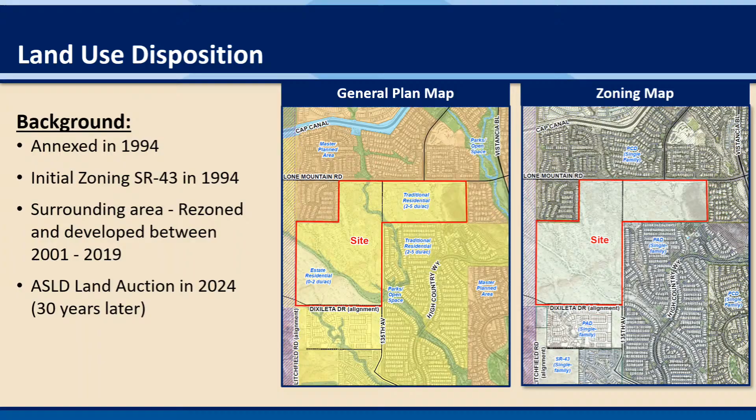As far as zoning goes, zoning is the actual development standards that would apply to the property. The site is zoned SR 43, and the surrounding areas, as mentioned, are primarily master planned areas, whether it be a planned area development or a planned community development.

Before we get into staff's analysis, I first want to orient you and give you a little bit of background on what the applicant's proposing to do should the zoning case go through, and give you an idea of what they're looking at proposing. This is a conceptual drawing of what the applicant is seeking to do.

The development, as proposed, would be an ungated 655-lot single-family residential community. The proposed planned area development standards would require 90 acres of open space.

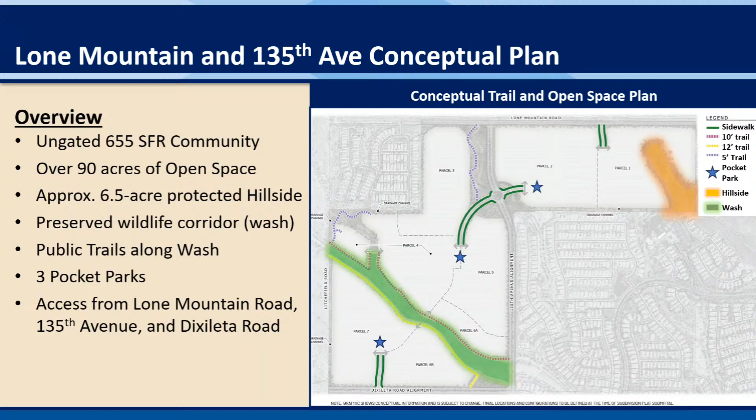That thumb I had mentioned earlier is a little easier to see here. The hillside area is about 6.5 acres and is expected to be protected on the property. There are two washes, as mentioned earlier. One of them is significant, has a larger flow, and would require a wildlife corridor.

As you can see in that green shaded area, there's a wildlife corridor proposed with trails on both sides of the wash. There's a less significant wash area with less flow along the 135th Avenue alignment, which is proposed to be preserved as an open space area with a trail along it as well.

Within the development, there is a proposal for 3 pocket parks strategically placed throughout the development to provide open space for residents. Since it's ungated, any neighboring property would have access to use those trails or access the wash corridors should they wish.

In addition, there is a proposal for access points along Lone Mountain and Dixileta Drive. Specifically, 2 points would be proposed along Lone Mountain to the north along the 135th alignment and the Westland alignment, and a third one along the Dixileta alignment to the south.

Through various conversations, the applicant group has coordinated with residents through public engagement and worked on creating design mitigation to try to come up with a solution that would be appealing to residents and make sure that it was context sensitive. Part of their discussion had led them to create additional standards for land use buffers.

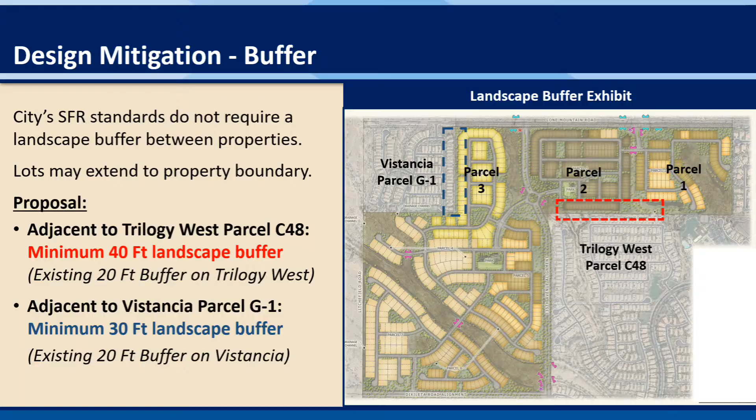Within this particular development, as part of the zoning stipulations, the applicant is proposing to impose their own land use buffer to parcels 3 and 2, as seen on the screen. This land use buffer would apply to lots located on the border of Vistancia parcel G1 and Trilogy West parcel C48.

Specifically, the applicant would be required to have a 40-foot wide landscape buffer added to the southern property line, shown in the red dashed line. In addition to the 20 feet already provided with Trilogy West, it would result in about 60 feet of landscape buffer between the two residential lots.

On the west side, looking at parcel 3, there would be a 30-foot buffer in addition to a 20-foot buffer, resulting in a total of about 50 feet of landscape buffer. This is a pretty generous buffer considering that single-family residential doesn't need a buffer, but they've worked it out in those specific areas and will be integrating it into their development standards should this be approved.

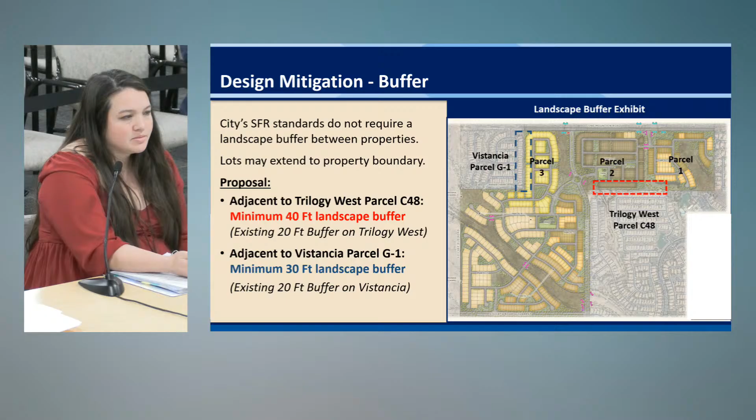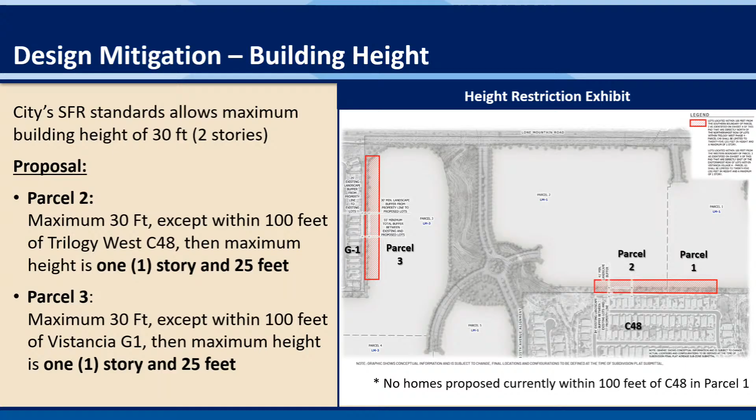The second consideration the applicant worked with neighbors on was maximum building heights. In single-family residential, the majority of developments are permitted a 30-foot building height, equating to about a 2-story house. Within this development, the applicant proposes restrictions within parcel 3 and parcel 2, requiring that all homes within 100 feet of the southern and northwestern property lines, shaded in red, have a maximum height of 1 story and 25 feet. For context, recent design review applications have had elevations up to about 23 feet, comparable to a 1-story house, so it's specific to identify 1 story and 25 feet.

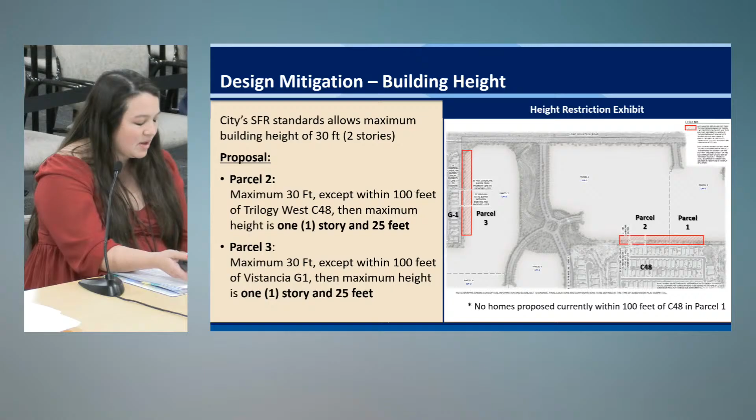Now looking at staff's analysis on the actual property. Our main role is to evaluate the land use types being proposed, the limitations identified as part of the development standards for a planned area development, and then make an evaluation on what those standards are. When we evaluate projects, we can't evaluate whether a product is for sale or for lease, and we can't base our opinions on perception or what could happen based on the type of people that might move in. We have to make sure decisions are based on code requirements rather than being arbitrary. So we're proposing what is existing on the site, what can happen on the site, and how this proposal compares to what's already allowed in that area.

Another thing to note is the authority of the case: it's not a staff decision, and it's also not a Planning and Zoning Commission decision. Ultimately, as a result of this meeting, it's going to go to City Council, and City Council will be the ones to decide whether the zoning case is approved. Today we're really just talking about the use and whether or not it's appropriate, and making recommendations.

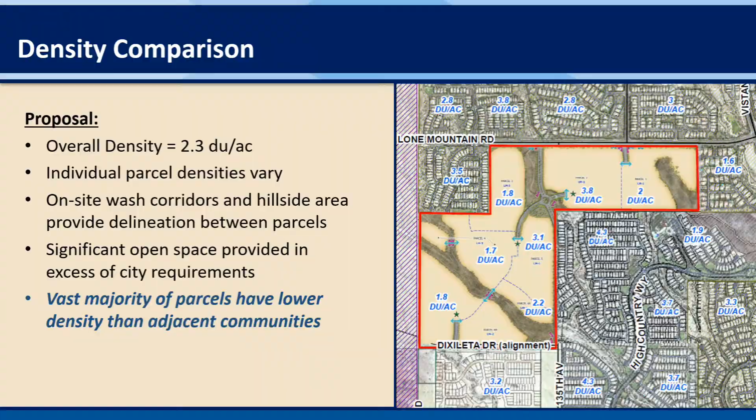For context, the estate residential portion is at 1.8 dwelling units per acre for that one parcel. Looking through the development, parcel 2 is labeled as 3.8 dwelling units per acre in the center of the site, just east of 135th Avenue. Whereas if you look south in the Trilogy West area, there's a 4.3 dwelling units per acre density in that same traditional land use classification. So even though parcel 2 is the most dense area within the proposed planned area development, it's actually less dense than what exists just to the south of it.

Similarly, when you look at the G1 parcel, which is 3.5 dwelling units per acre on the Vistancia side, it neighbors two parcels, 3 and 4, that have 1.8 and 1.7 dwelling units per acre, which is much lower than the surrounding area. As a result, looking at the individual parcels and the development as a whole, the site is in conformance with the general plan land use classifications, and it's comparable with, if not less than, the surrounding area.

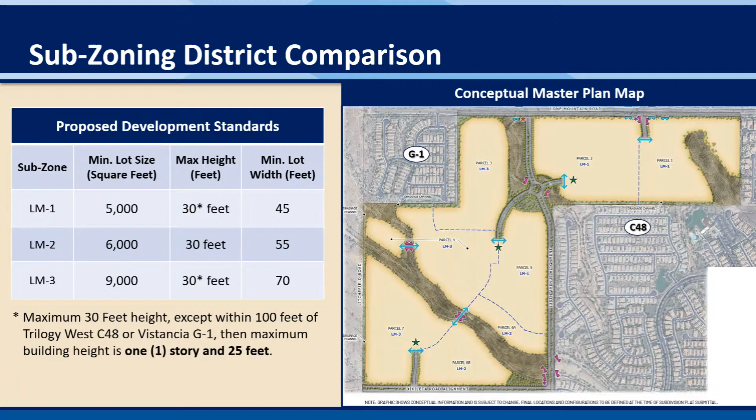As previously noted in the development summary, the applicant is proposing an added restriction on their development, which would restrict the building height on a couple of lots within parcels 2 and 3, limiting the height to 1 story when on the border of the existing residential developments in Trilogy West and Vistancia.

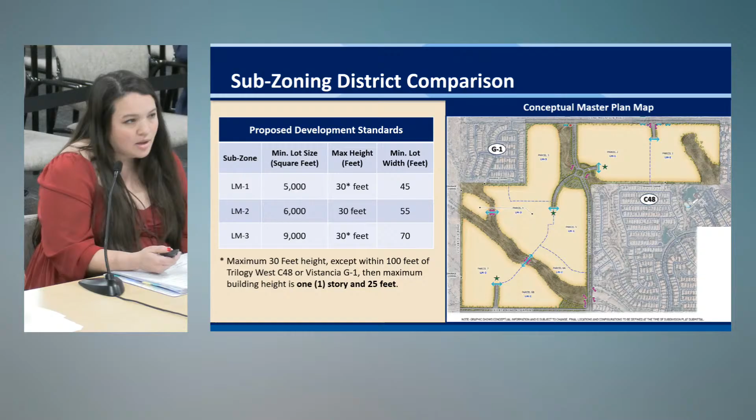Zooming out a little bit—I know this is harder to read, but I wanted to share a comparison of the development standards. The next step is evaluating how those proposed development standards align with adjacent development. Within the adjacent area, the smallest minimum lot size is directly across the street from parcel 3, located in Vistancia Parcel 3, which has a minimum lot size of 3,400 square feet and a minimum lot width of 40.

The largest development standard requirement is located in Parcel A1, just to the east of the site, which has a minimum lot width of 60 feet and lot area of 10,000 square feet. All other development standards have a largest lot width of 65 feet as a minimum requirement, but most fall within that range between 3,000 and 10,000, with the majority falling around 6,000.

So when you look at the comparison of the development standards, the proposed lot width minimum of 45 feet is actually wider than the minimum lot requirement of the developments in both Vistancia and Trilogy West. And the minimum lot area is also very comparable with the existing development.

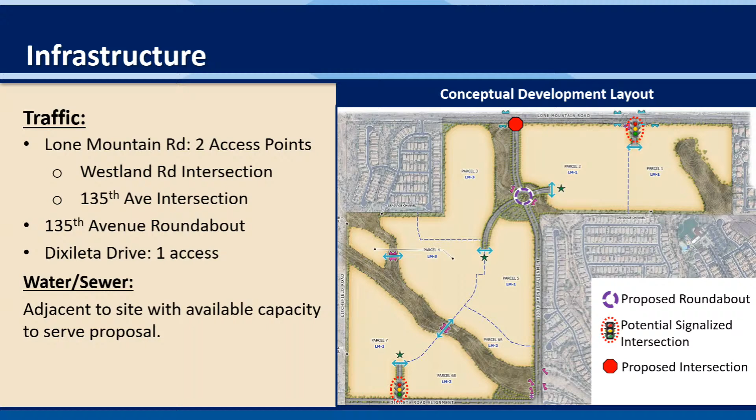However, as part of the conceptual plan that the applicant has drawn out, they are seeking to maintain that area as open space. They're proposing to put a trail in and have that water still convey through the site. That is part of the reason why the 135th Avenue is changing the alignment to allow the water to flow through the site. So that is an added change that the applicant has proposed, which adds more open space than what would typically be required.

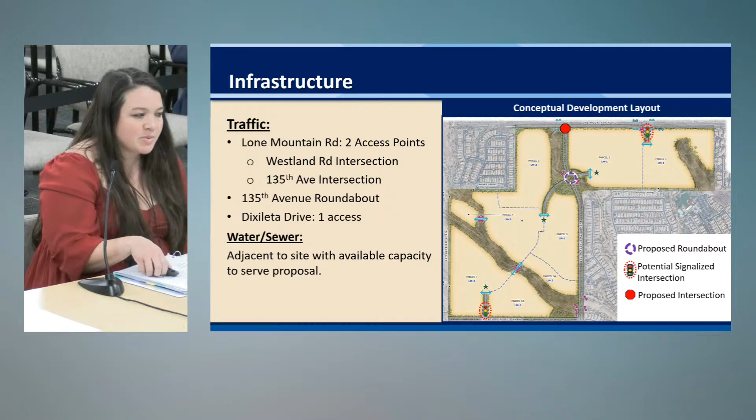So next, onto the community outreach portion. I think this is the last title for you guys to go through with me. But with any outreach or with any planned area development or rezoning process that is being created, the applicant is required to go through an outreach process.

Whenever we receive entitlement cases, we send notices to surrounding community partners such as the school district. This specific property is located in the PUSD boundary. Specifically, students would attend the Lake Pleasant Elementary School or Liberty High School. The city has not received any specific comments related to this project from the school district at this time.

The applicant is also required to hold at least one neighborhood meeting. They held that meeting in June at the Vistancia Elementary School. There was a pretty large attendance at that meeting. It was an open house format, and there was approximately 93 people that went in and out during that hour and a half span.

There was 37 comment cards that were provided to the applicant in response to that meeting, in addition to 5 emails that were sent after the meeting. Also note that the applicant hired an outreach team, so as a result, a lot of the correspondence related to the case was directly received by the applicant's outreach team and captured within their citizen participation plan, which a lot of times we receive directly, but in this case, there was a lot that went through them as well that we did not receive specifically.

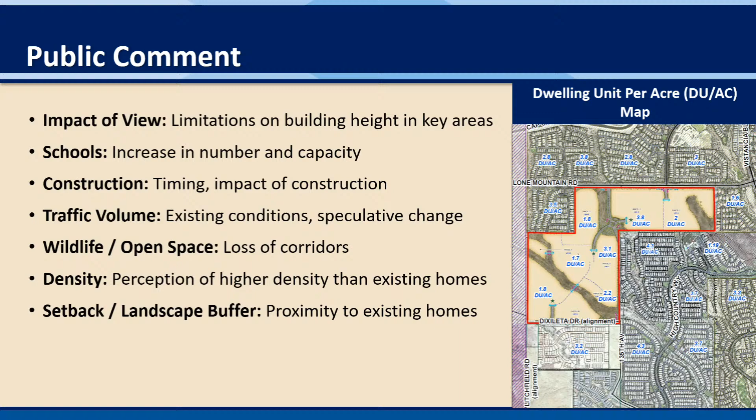Looking at the specific comments that were received, here's a summary: there were comments related to impact of views, school, construction, traffic volume, wildlife, open space, density, and setback. I'll break down each of those comments more specifically on this slide.

The first item, which was a recurring theme, was related to impact of views. This comment was twofold. Some individuals were commenting on the fact that the state land was sold and the property was getting developed. As noted before, it's state land's mission to sell land for development when it reaches its economic value for the benefit of state beneficiaries. So the land was never entitled for open space. The reason that property is getting developed is because it came to market for the first time in 30 years, and now has ownership seeking to develop it.

The other part related to impact of views was more specifically about the visual impact of buildings and how those buildings would look from residential lots. As we discussed when looking at development standards, 30 feet or 2 stories is typical across all single-family residential. Current standards for what SR 43 allows would permit 30 feet or 2 stories. So the applicant's proposal to add a restriction of 1 story mitigates some concerns, going beyond what would typically be required if they developed as currently entitled, and is also generous compared to what exists in the existing planned area development requirements.

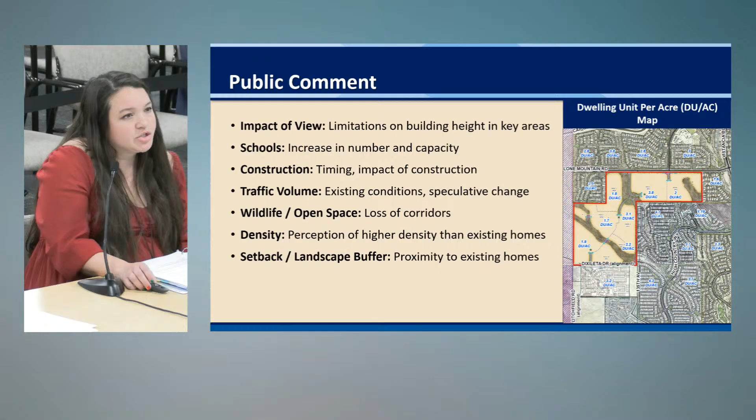So that was a lot, but in summary, staff finds that the density of the proposed development aligns with the general plan and is consistent with what is in the surrounding area. The development standards proposed are sensitive to comments and other design solutions.

That are not currently offered in the existing zoning designation or what could be developed on the site. The site integrates open space areas along the Wash and Hillside area, which aligns with the general plan policy and goals. And if the rezoning were to be approved, it is not anticipated to have an inordinate impact on the adjacent properties.

So with that, there are a couple actions that Planning and Zoning Commission is able to do in response to this presentation. They can recommend with modifications, recommend to deny, or recommend to continue this case. With that, staff recommends approval of item 3R to go to City Council subject to conditions of approval in Exhibit 1.

So two things: the applicant is available, they have a presentation that they were hoping to give. Staff is available for questions, and I know there are a number of members in the audience who wish to speak as well after the applicant's presentation.

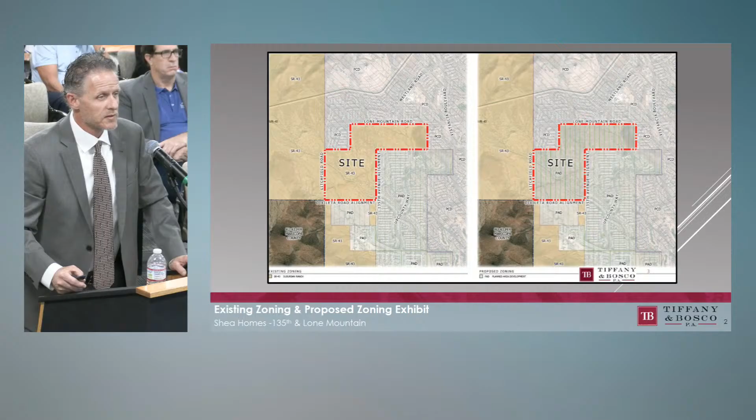I'm going to sort of repeat some of that, but I'm going to stick to basically the general plan and our neighborhood outreach and not be as repetitive to what was already stated. Again, our rezoning is to a PAD. It is similar to the surrounding zonings that we're surrounded by with regards to the PCD, a similar zoning district, as well as the Trilogy PAD and the PAD that's directly south of us.

With regards to the general plan, Sarah did mention that we have two different residential districts, an estate residential and a traditional. We are well below the densities allowed in those districts. And from the beginning, and I'll go to this next slide which sort of zooms into the two residential categories, the light yellow and the darker yellow, we have been from pre-app all the way to today basically showing a lotting plan, even though the lotting plan isn't a part of your zoning case.

We wanted to be specifically transparent with what the goal was, which is to develop a single-family neighborhood that is compatible and consistent with our surrounding properties.

In our pre-app, we actually included a lotting plan. This plan has changed several times, but this one was done for the GP analysis, demonstrating that the GP allows for 1,180 units if someone could fit that on this site. We're proposing approximately 655 as part of our PAD ask. The plat we've submitted to the city is at 641 lots, based on all the open space requirements and design changes we've made.

There's just a couple of the goals from the general plan. There's a lot more in the staff report and in our narrative, but basically the outline I've highlighted in green demonstrates that we've met the open space requirements and the goals and policies of your general plan with regard to the design of this plat.

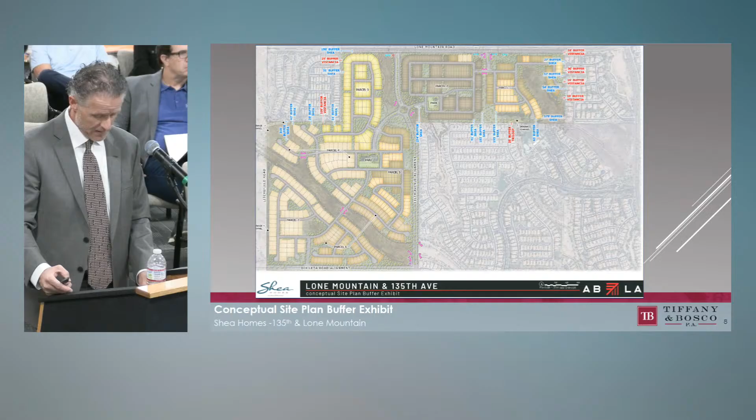From June until now, we've been working with staff and the neighborhoods, responding to issues and coming up with solutions on the buffers, where we can do the single-story option, and what the makeup of 135th Avenue could develop out as. For the past 5 or 6 months, we've been working on those consistently. In that time, the most we heard from were Trilogy residents, so we decided to do another open house at their clubhouse on November 24th, where we had about 65 attendees, and we walked through the changes we made, which mostly dealt with buffers.

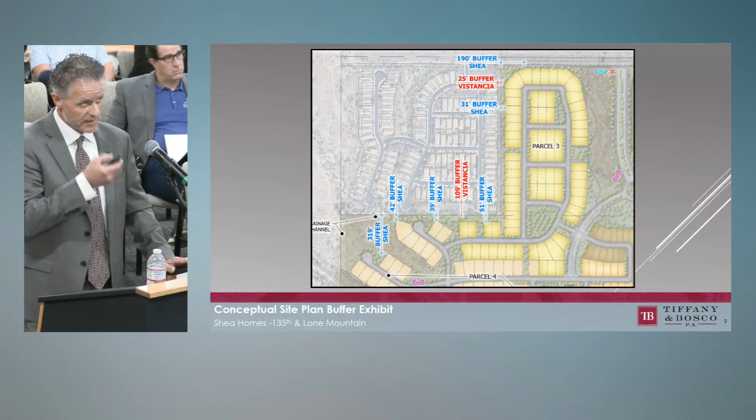Let me get to the Vistancia area—that's this graphic here, a close-up of our northwest side. We wanted to make sure our buffers were bigger than the buffers adjacent to us. That was one goal of ours.

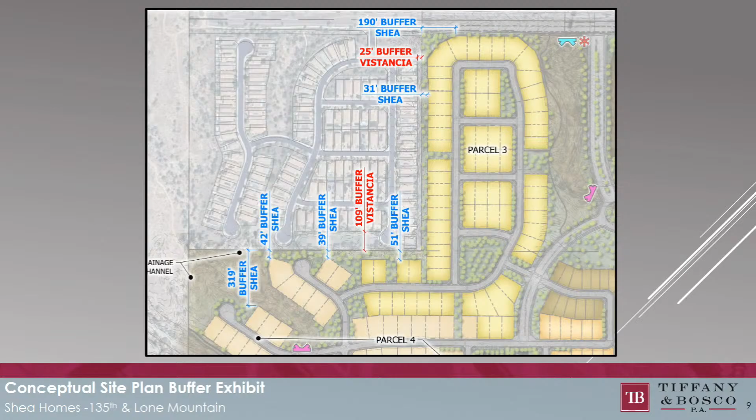Their buffer is at about 25 feet, in red there on the east side of their subdivision. Ours is at 31 feet. Also, in those rows of homes in yellow along our west property line where it says 31-foot buffer, we're going to stipulate those homes to be single-story. Those are for the Vistancia residents. They showed up at the June 4th open house, and that was their main concern. We have larger buffers along the south, but I think those were the less concern with regards to buffers and single-story.

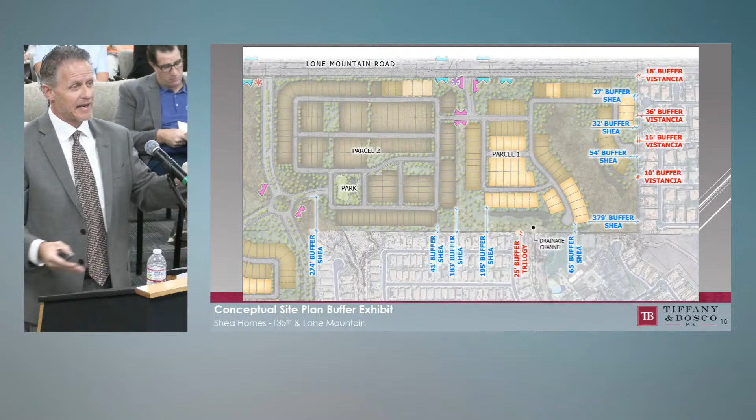So that gives you a 65-foot plus buffer between the backs of walls to the Trilogy lots and our walls. We have some greater buffers. I think the key is if you look at the land plan, Trilogy from the east over to the west has a cul-de-sac coming up on the east end with lots on it. Well, we have a cul-de-sac coming down with our side lots showing up on it. So we didn't really stack our lots along the south boundary. We utilized open spaces similar to the way they designed their site.

They have a large amenity center there where it says a 65-foot buffer, Shea. That's a large amenity center that they have. So we basically have an open space and a cul-de-sac adjacent to that. As you keep going west, we have a very large open space that handles drainage and open space. We have a 35% requirement for passive, active, and natural open space. So we put it in spots that were beneficial to our adjacent neighbors.

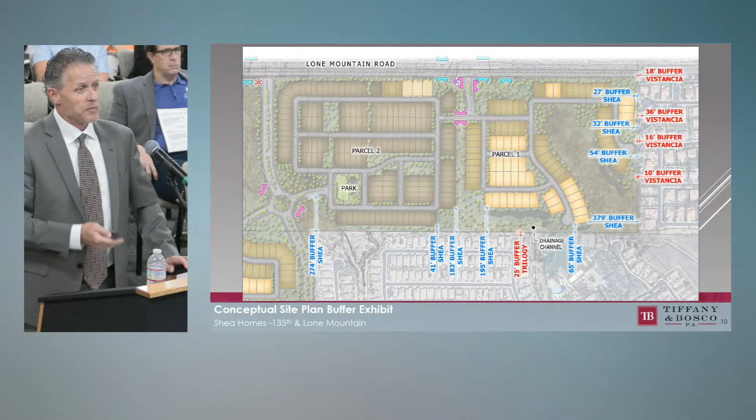Then you have the row of lots on the Trilogy side along the entire north side of Montesoro. I'm not sure the number of lots, let's just say approximately 20 lots. We did not align our lots along our south property line with theirs; we offset it further to the west. We're committing that every lot that backs to a lot - approximately 7 lots there on the Trilogy West side - will be single story on those lots that directly back to it. That equates to about 7 or 8 lots on our property. We want to commit to those and we put those in our PAD standard booklets.

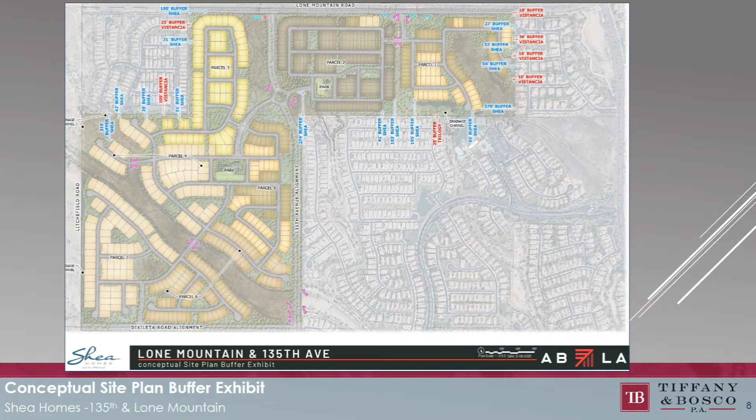You may hear tonight, and we've gotten some emails post the November 24th meeting, a request along - let me go back to the big graphic here - along the entire west side of the 135th Street, 35th Avenue alignment. We received some more requests for single story along our eastern side of our development, basically directly west of the 135th Ave alignment. We haven't made those changes.

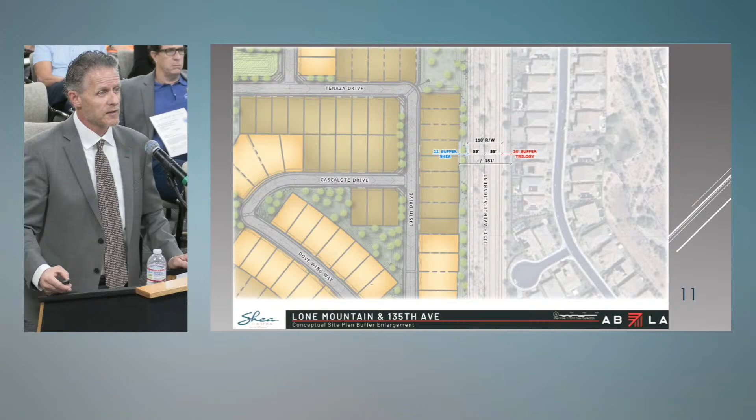I wanted to demonstrate that our graphic here shows there's approximately 150 feet of distance between the back walls of the Trilogy folks facing west across 135th Avenue. So we've got a 150-foot buffer, and then we have another 15 feet before you get to the actual back of the home, so you have a 165-foot buffer. A single story stipulation doesn't make much sense since it's a max of 25 feet for single story, and we're only asking for 30 feet. When you get to that distance, we believe - and it might not be agreeable to the neighbors - you can't discern between the 25 feet and the 30 feet at that point. So we haven't made any changes to our plan along our eastern boundary.

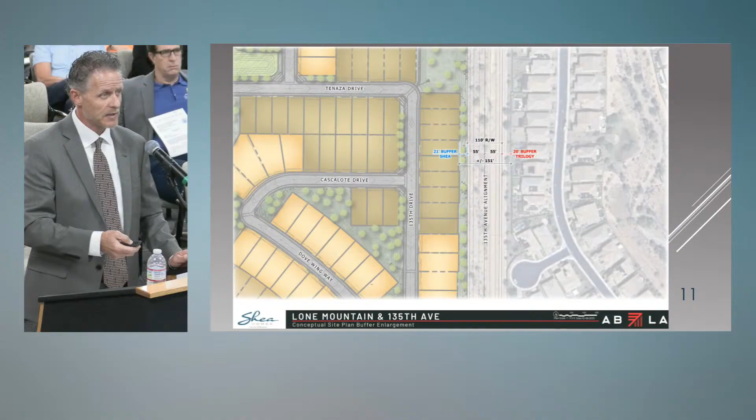This is the graphic that Sarah showed, that shows where the single story homes are - if there's a lot anywhere in those red areas in our plat, it demonstrates what the minimum buffers are and where the single story homes need to be. That's part of our PAD submittal also.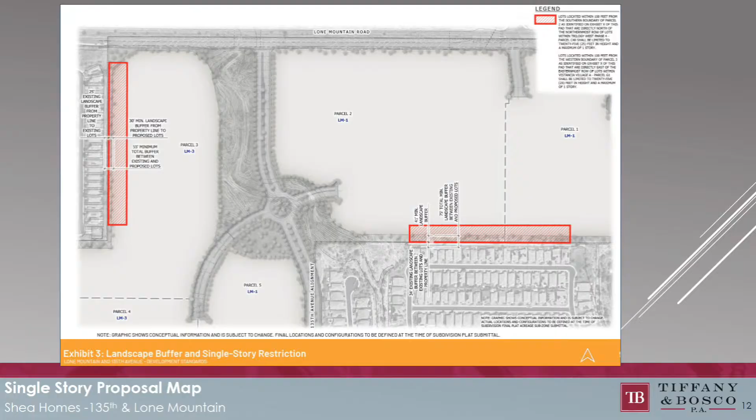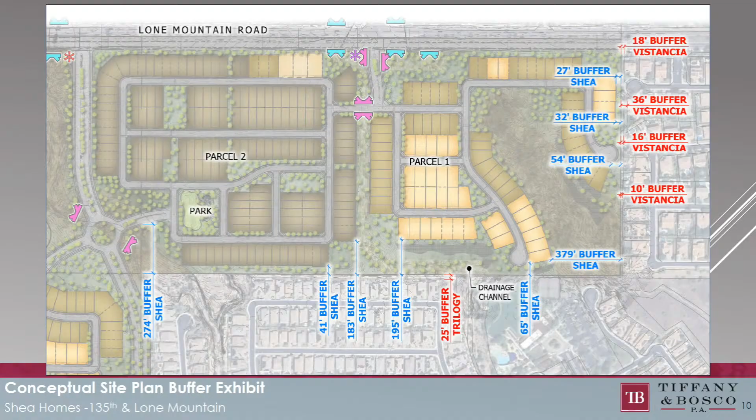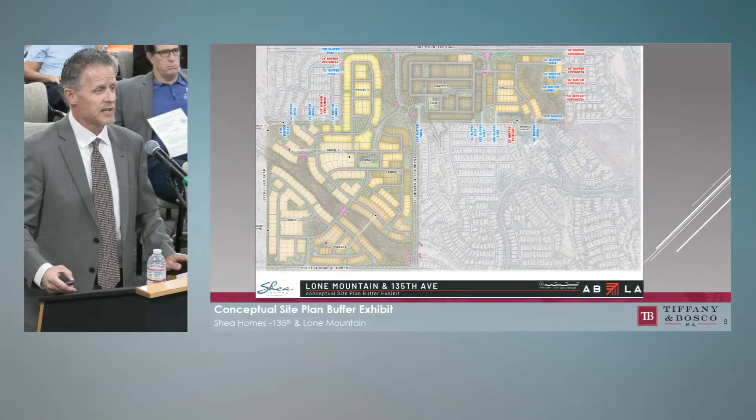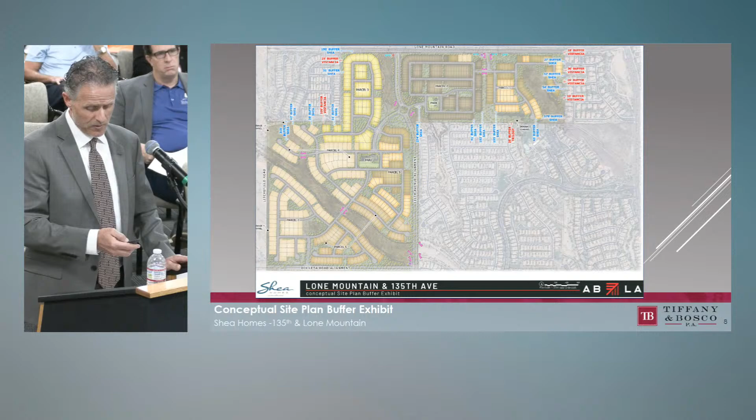And then the 135th Avenue design. This was something that we spent some time with city staff on. We're going to build 135th Avenue. If I go back and show you where it is in the entire development, it starts at Lone Mountain, curves into a roundabout, and then goes along the western boundary of Trilogy West. It would be built all the way down to, I think, Blackstone Drive, south of this graphic, connecting up to Ridgeline. Shea will be responsible for building out this right-of-way, but in order to minimize that project, we worked with city staff.

The top graphic is what the arterial section should be: 2 lanes in each direction, a smaller median with bike lanes on either side. We're going to build out just single lanes, and then when there's enough traffic for this roadway, we'll improve the median. There's already going to be a design that will allow the median to be improved, and it will be no closer to the residents on our side or the Trilogy West side.

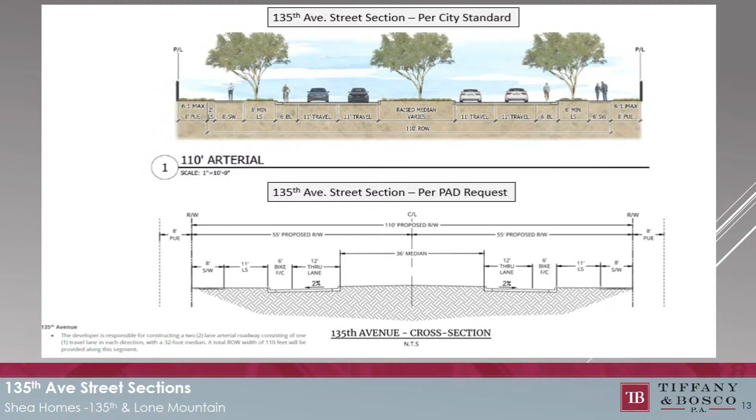So with that, I'll close and be happy to answer any questions. But again, we started from the beginning of designing this site to fit in with the neighborhood. We provided buffers, we provided lower densities from pre-app all the way till now. We've been consistent and transparent with our neighborhood outreach, not only with Kyle Moyer's office and all their folks and reaching out to all the emails and phone calls, but having those 2 open houses where we really engaged with the neighbors.

We've been methodical in evaluating how to do our project. We didn't try to rush it. We started at the beginning of the year; it's now the end of the year. So this will take us into next year before we're considered for approval. Bottom line, we feel we've addressed a lot of the concerns. We may not have addressed all the concerns—you may hear some more tonight—but we feel like we've taken the steps to address most of the concerns we've heard. With that, I'd be happy to close. Respectfully request a positive recommendation to the City Council.

Let me turn my mic on. There we go. Well, thank you, sir, a very in-depth overview on this project. Don't leave us yet—I do know that my commissioners have some questions and some clarification needed. I'll go ahead and start on this side. Come right back to you, Commissioner Cottrell. So we'll start at the end. Commissioner Gaynor. Oh, no, you can. Thank you, Madam Chair, you can start. There we go, Commissioner Cottrell. Let's go. There we go. Thank you. There you go. Thank you for your presentation as well.

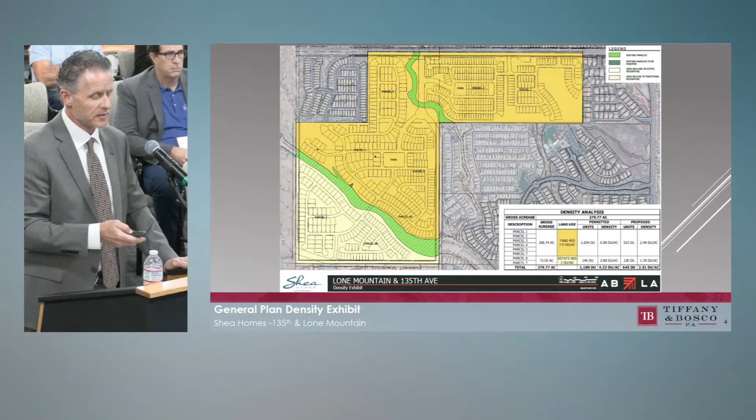I had read through, and I know there's a lot of citizen comments in here, and a few of them actually mention some density numbers that are different than what you have presented here, 4, 4.5. I just wanted to ask, could you comment on that? You said in your presentation that this is similar to what you've always presented—was there any presentation in the past that was different that you changed? There may have been, Chair and Commissioner Cottrell, there may have been from this plan here. Now this actually only shows up at 645 units, but no—there's never been any major changes to our land plan. We worked with staff, had 3 reviews where we worked with staff on realigning some roads and things, and lots moved around. But these densities have pretty much remained consistent throughout our process.

Okay, just wanted to get your feedback there. And I also see, and this is my second question, one of the stipulations is a request for a revision to the traffic report. Since there was also a lot of comments about traffic, could you chime in on what those revisions are—is this a staff request on the traffic report? Do you know which intersections were analyzed, how far did you go, things like that? Sure, I think the changes just deal with some semantics. I think there's some further analysis—I can't really point, but on this graphic, it's the intersection on the east end of our proposal where it says 3.8 DU and 2.8 DU.

That intersection, I think, has a failure going northbound from Westland, at Westland and Lone Mountain, and I think it's probably school traffic that creates that. Staff touched on that, noting there's a potential consideration of a traffic signal there in the future. Other than that, our traffic study had a level of service D or greater that weren't creating issues for surrounding roads. So the 135th Avenue alignment and its construction doesn't require the full build out at this point, because your general plan has designated this area for a higher density, and we're building on a lower density.

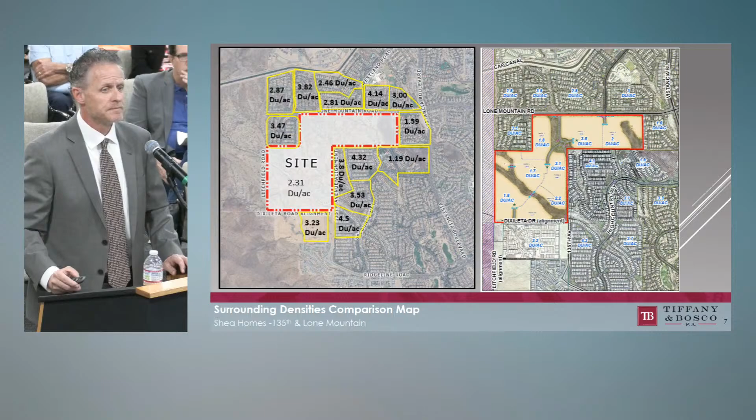And then you mentioned, of course, we have Shea Homes and the other builders. How many of these builders have already built in this region, in this vicinity? I believe they all have, I believe they all have a footprint here in the West Valley. Okay, thank you, and I have a question for staff.

Actually, a clarification. When I first started doing this 18 years ago, I was always confused about what you could do on state land. So you mentioned it a couple times today, but you mentioned it softly. Could you clarify, is state land protected land?

Commissioner Cottrell, state land is trust land held by the state to be sold or leased for the benefit of beneficiaries. So it's not protected land. It's actually intended for economic gain for the state and their beneficiaries. The trust land you would potentially consider recreational or protected land is theoretically Bureau of Land Management, which is a different type of trust land.

Lori covered it pretty in depth with the last presentation related to state land, but no, it's not open space protected. Lori, do you want to add any more? Sorry, I stumbled through that.